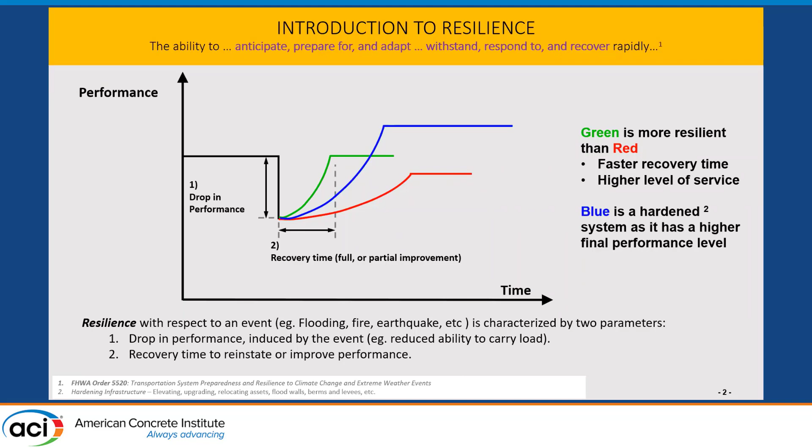So my outline today, now that we have the definition and hopefully a pretty good understanding of what resilience in terms of pavement means, this is what I hope to cover: the why, the need, of course, for resilient airfield pavements. Why is it so important today versus, say, 10 years ago?

How to design for resilience. What's the FAA doing today that maybe wasn't being considered 5 years ago? And then I'm going to share a couple case studies to let you see how airports are already incorporating resilience into their decisions as they're rehabbing their pavements.

This picture here is of a GA airport in Eastern North Carolina after one of our severe weather events, I think back in 2018. We had over 3,000 roads that were closed at one time, and we had several airports closed, international airports as well as GA airports.

These airports for many communities are the lifeline to get supplies in. Roads were being cut off, so you needed that airport to bring in water, to bring in medical supplies. And obviously, when your pavement's underwater, it's difficult to do that.

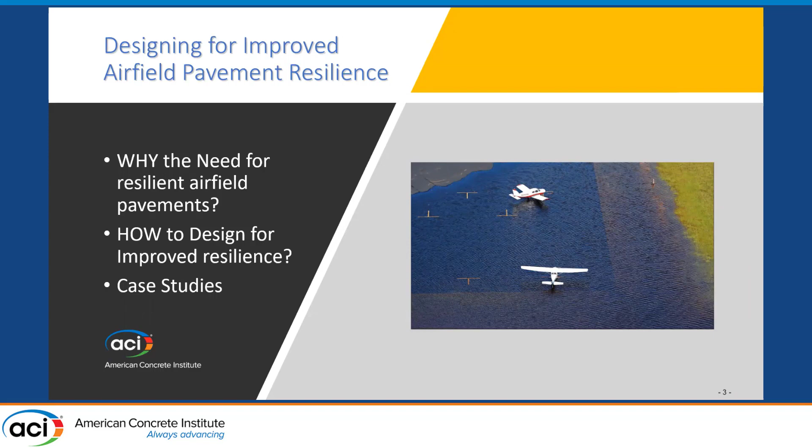So how have our climate conditions changed recently? This graph illustrates that very succinctly, based upon studies that our precipitation and our weather events are becoming far more intense.

As you can see here, by the late 21st century, we're expected to see a large percentage change in severe weather, especially up in the Northeast and out west.

I think most of you have seen studies or read recent reports about what's happening with sea level rise. Obviously that's not impacting your airports in the middle of the country, but it is impacting our airports that are in close proximity to oceans.

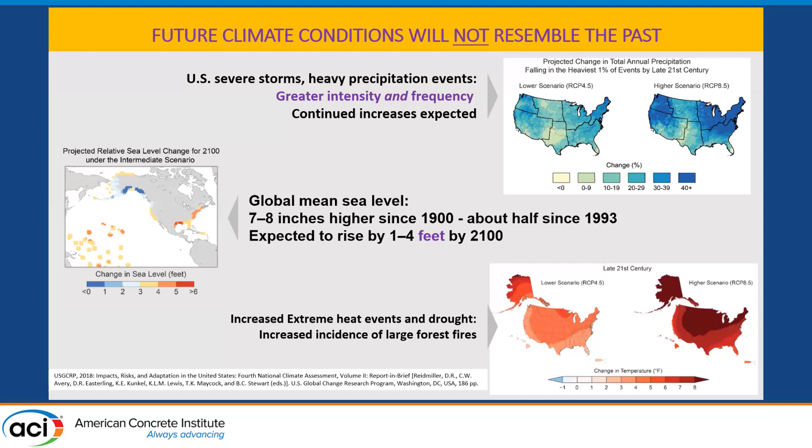Some of our infrastructure is also being impacted by heat events and drought. So most of my talk today is really going to be talking more along the lines of flood. Again, being from the Southeast, that tends to impact us more.

This slide is from McKinsey and Company. It illustrates, for all the various transportation assets, certain types of shocks and risks that can be incurred by these various events. As you can see for airports, some of the more severe ones are your storms, your hurricanes, your intense rainfall events that cause flooding. A lot of our airports are now being impacted by that.

So climate risk increases the operating costs for these airports, as well as exacerbates that funding shortfall that I'm sure most of y'all are well aware of. There's just not enough money to take care of our existing rehab, much less what's likely to occur in the future.

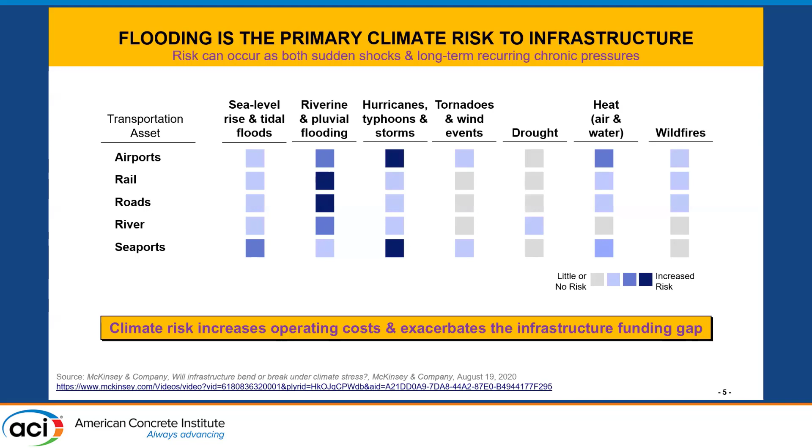So I mentioned sea level rise, and what's happening is due to our warming climate. We're seeing melting ice at our two poles, and just the nature of a warming climate, the particles get larger, and therefore the sea level comes up.

So these are what's called king tides or sunny day floods. In other words, these floods are occurring without any additional rainfall, and we're seeing our infrastructure impacted. Here in Miami, Florida, water is overtopping our roadways, and it may not be overtopping our airports as much, but we're seeing increased groundwater rise.

So a recent study I saw is in Charleston. Just in 2019, we had 13 days where water, due to sea level rise, sunny day rising tides, impacted our infrastructure. I think it was 20 years ago we were experiencing only 2 days of this. So in that 20-year period, we're seeing an increase just due to sea level rise.

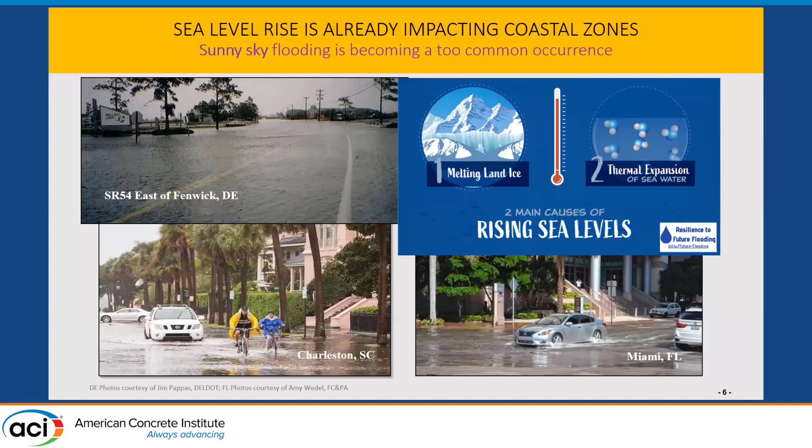Again, this is more pictures of where I live out in the Outer Banks. Just due to hurricane events, our runways are getting overtopped during these events, and then again, what I mentioned with that McKinsey slide, when it's not due to ocean water coming over top, we're seeing more and more river flooding due to increased rainwater events.

And again, this is impacting middle America. Many of our airports in the middle of the country are being impacted by this. So what's happening when water goes over top of our pavement is the pavement condition curves accelerate. I'll show you an example of that a little later.

The reason why is the water that's either coming over top of the pavement, but also increasing coming up from the bottom. Studies are showing that subgrades, depending on your subgrade material, can stay moist for over a year. People think, well, the water's gone, I'm fine, let's get the air traffic back on the runway, and you do - you've got to get your airport back open. But what's happening is it's stressing many of these pavements because those subgrade materials are wet.

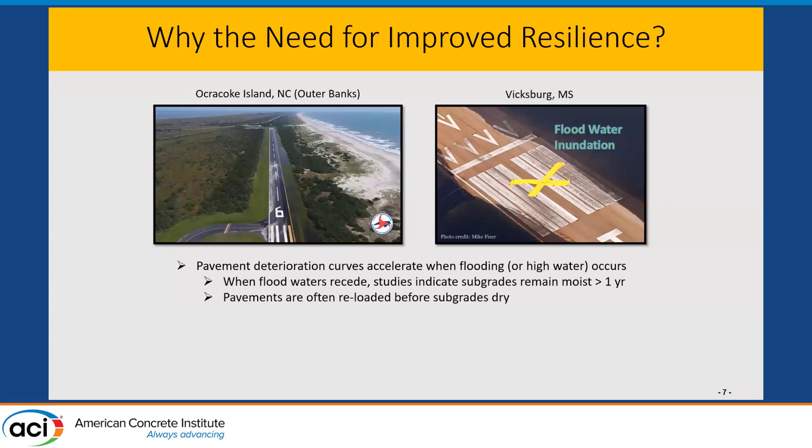So you'll see here what's happened is there is a difference. I wanted to point out how pavements respond to subgrade moisture, and again, it's designed for it - FAA designs for this. So asphalt pavements are known to be flexible, right? Rigid pavements, concrete pavements, are known to be rigid.

So with an asphalt pavement with a given load, especially for a lot of these GA airports - general aviation, small airports - that asphalt thickness is not that thick, and most of the load is really carried by the base and subgrade materials. With concrete, which is a more rigid system, it tends to spread that load out - you can see the shape of how that load is impacted down into the subgrade. Concrete's rigidity spreads the load, so the pressures on the subgrades are much lower. You can imagine that concrete's rigidity, being able to spread that load over a weakened subgrade, would be more favorable.

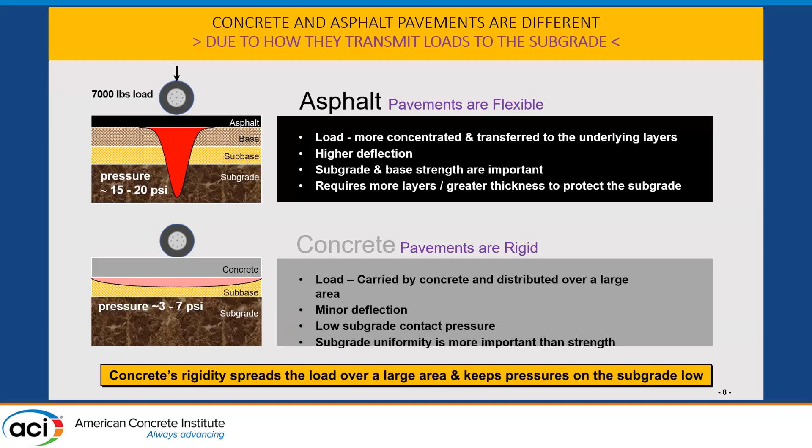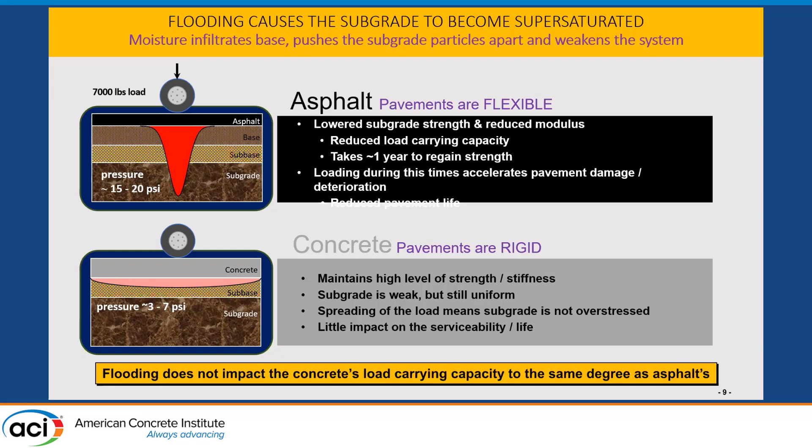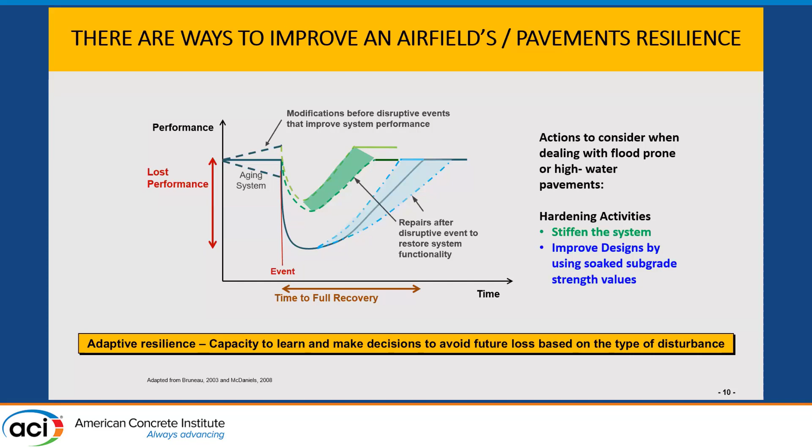So there are ways to improve an airfield pavement's resilience—that's the how, not the why. Going back to that aging system, there are things you can do, whether stiffening the system or using a particular rehab technique, so the pavement's performance isn't dropping off as fast and rebounds back higher than where you started. That's the adaptation part of the definition of resiliency. If you do things during rehab, the next event won't have the same impact—you won't see the same drop in serviceability before and after.

Here's a good example: another airport in Eastern North Carolina, Rocky Mount Wilson, right along the I-95 corridor. When hurricanes come up the coastline, people assume the damage happens right along the coast, but that's not true—a lot of that water gets thrown 100 miles inland into the Midlands or Piedmont of North Carolina. So it's actually some of our interior airports that get impacted more by hurricane events than the coastal communities. I'm not saying coastal communities don't have flooding issues, but many Piedmont region airports start experiencing things like this, where you see staining of materials coming up through cracks in the asphalt and sometimes the concrete.

So what you want to do is address this with your rehab. What's the FAA doing? That's why I wanted to show this chart—they just released a new design circular in June, illustrating why and how resiliency is becoming a larger factor. If you look at their prior edition, the 6F versus the 6G, the term 'water inundation' wasn't even mentioned in the 2016 circular. Now in 2021, it's mentioned twice.

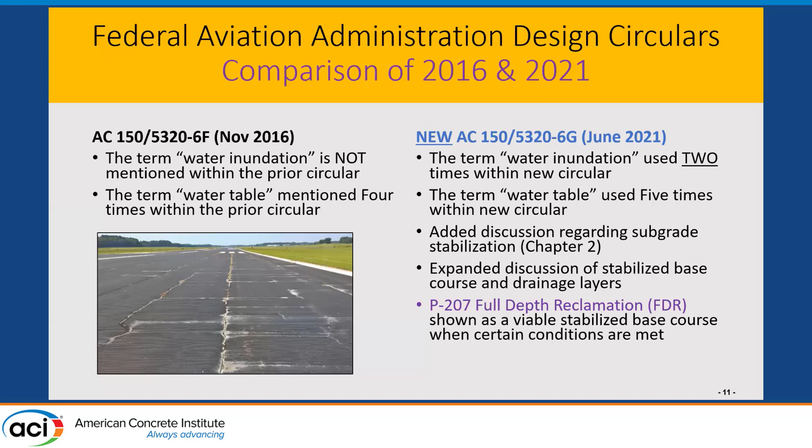So they're stressing the importance, as a consultant, of developing the appropriate rehab strategy—saying consider if that airport has been inundated with water. Although they've always used the term 'water table'—where's the water table below your pavement—that too is getting a larger focus. With the new circular, you're seeing added discussion regarding the importance of subgrade stabilization. I'll share why they're emphasizing that. There's also a new technique I wanted to bring to light for those who may not be aware—called full depth reclamation—things you can do to stabilize that base as you're rehabbing the pavement.

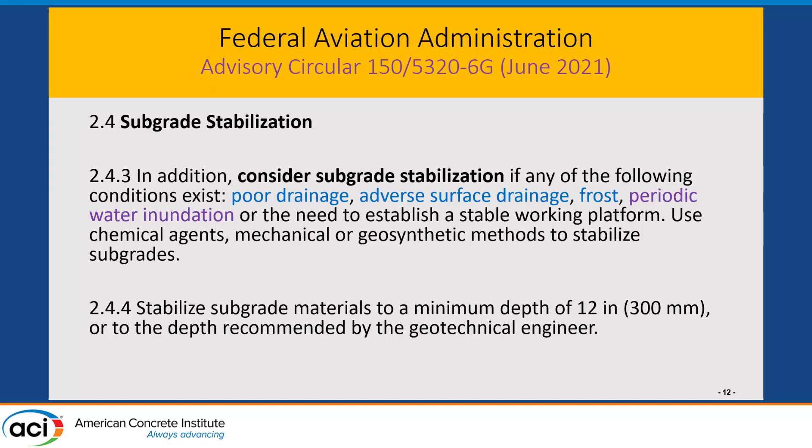So subgrade stabilization is part of that design circular. The latest version now says, under subgrade stabilization, you should consider it if you have certain conditions. It's always included poor drainage and adverse surface drainage, but what's new is this 'periodic water inundation.' So the engineer who goes out, completes field studies, and looks at the history of that pavement now has to take into context this term water inundation. It encourages you, through this circular, to stabilize that subgrade material—something that wasn't as emphasized in the older version.

So how do we improve the resilience of our airfield pavements? These are techniques that can be considered when the engineer goes out and does evaluations. You can stabilize that base through various specifications—the 207, which I just mentioned, and the 304, 306, and 307, which have always been there. These are different ways of stabilizing your bases or providing a stabilized base under your P501 concrete layer. The 307 is actually a drainage course, something I didn't see much of in our southeastern area. This picture is at an Air Force base in eastern Fayetteville, North Carolina, where they used a cement-stabilized drainage layer.

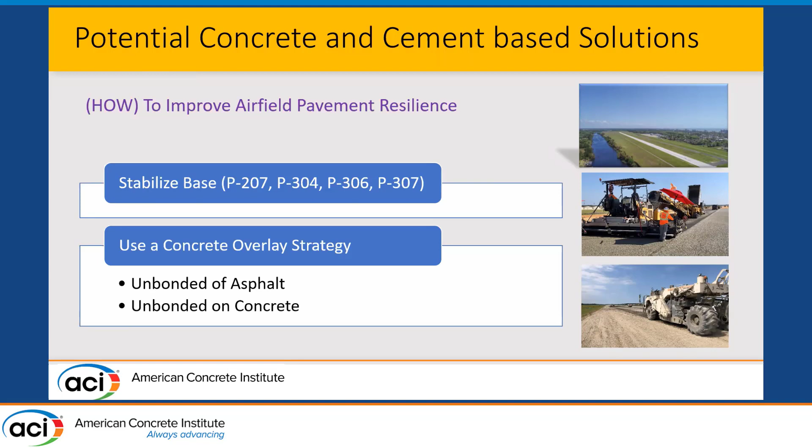What we're seeing in this new circular is added emphasis to consider using those kinds of materials to help move water in a positive direction. The other technique I'll talk about is this concrete overlay strategy, and I'll go through that quickly. So what does FDR do for you?

It hardens your system. Compared to an unstabilized material, it lowers those pressures right in your subgrade. That's what full depth reclamation does. It minimizes, though doesn't totally eliminate, the permeability of water coming up from the bottom and affecting this top layer. It's that capillary action that causes your subgrade materials to get weaker.

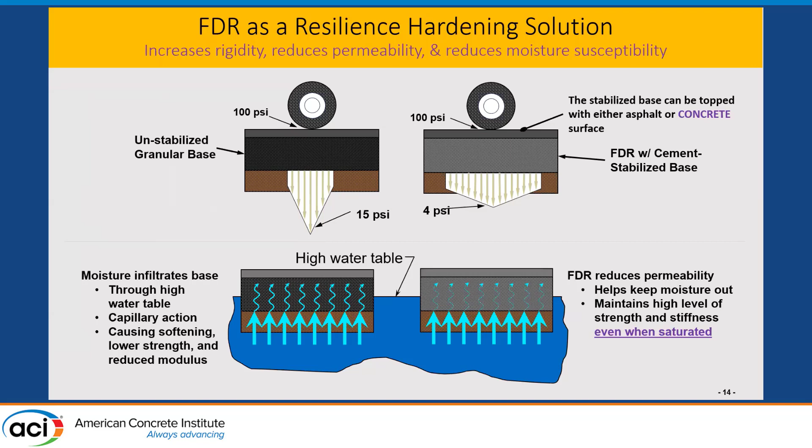That's the reason we're seeing techniques like full depth reclamation being used more, especially for general aviation type airports. This shows the diagram of full depth reclamation for those who haven't seen it before. Here's the equipment that reclaims both your distressed asphalt pavement and captures some of that base material underneath. Then you put a binder with it, typically cement, to make it harden.

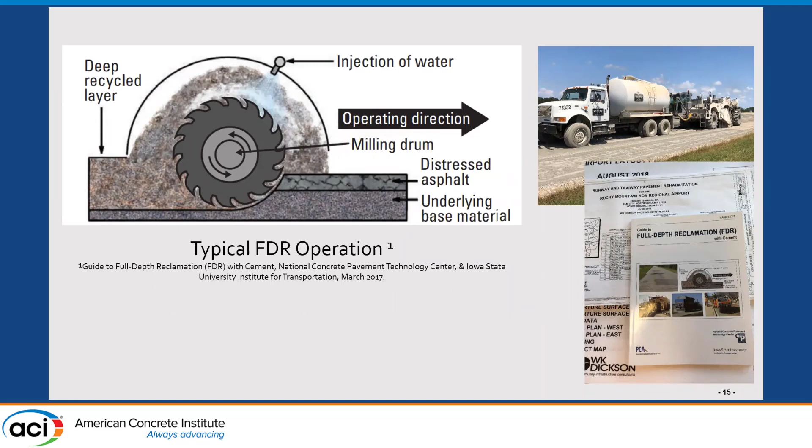The CP Tech Center has a great bulletin on full depth reclamation you can pull from their website. We're seeing that rehab technique used for general aviation airports—not the big commercial airports Mark oversees, but smaller airports, and there are thousands of them across the country. When that asphalt pavement begins to distress and need rehab, more and more consultants are looking toward this type of technique.

This shows that when your asphalt surface is distressed, you go through and reclaim it, pulverizing these materials. You even capture a little subgrade in it. Then you come through and grade it off because you're going to be putting a new surface in.

Here is when you start injecting cement and water. This is all done through a geotech firm that usually designs this material—how much cement, how much water you need. Then this new surface, which can be either asphalt or concrete, can be placed directly on top. These are the steps of using that full depth reclamation process.

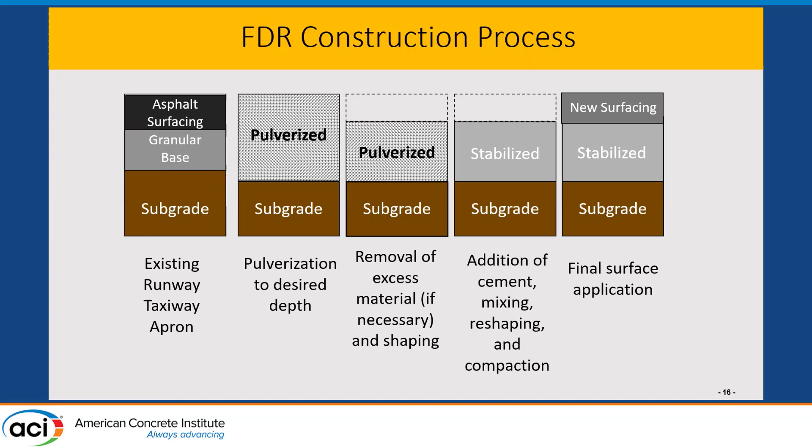This is just a typical diagram. Again, this isn't Georgia—this is GA, meaning General Aviation Runway. This is just a typical section that I see as this technique is being used.

The question I commonly get with these jobs is, how important are these edge drains? They add cost, right? We know these pavements are affected by water. For an airport like New York or Atlanta Hartsfield, edge drains are pretty important. For a general aviation airport, is there enough value? That's a good research topic, Peter. We're seeing questions from the consultant community saying these edge drains can be 10% of the job costs for these small airports. So it's always cost versus benefit.

The other big question we commonly get is, how strong is too strong for that new reclaimed base? Everyone wants to add more cement, thinking let's build the strongest base we can. That's not the best, is it? If you build it too strong, this base cracks, and especially if you top it with an asphalt pavement that has a lower modulus of elasticity, every crack that forms in this base reflects up through it. That's one benefit of topping it with concrete—we don't have to worry about the strength as much. But on most jobs topped with asphalt, you really need to control the strength of that base. That's why it can be too strong.

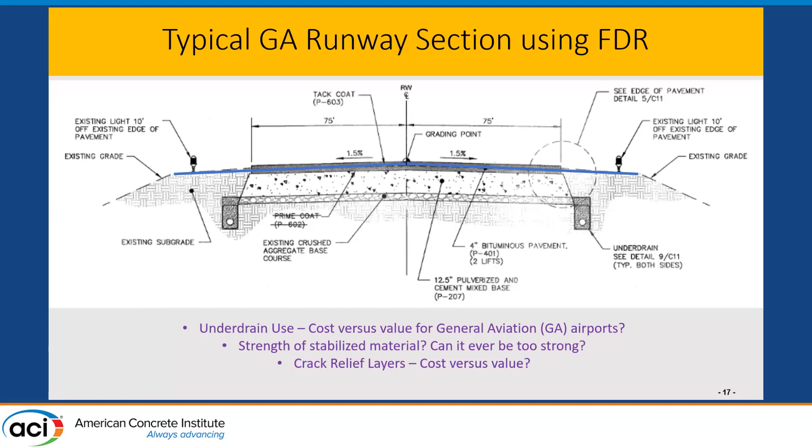And by the time you put in your edge drains, put in crack relief layers, you're just increasing the cost of your projects. That may be warranted, but it's something to think about.

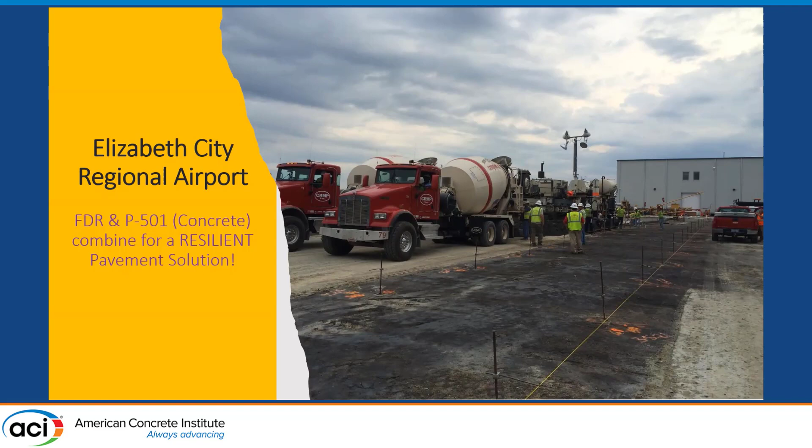Here is a case study at Elizabeth City where we not only reclaimed the base, but the old asphalt pavement was removed and reclaimed. You can see the FDR has already been placed on top, and this is the prime coat that's placed usually on top of that. Then for this particular job, we actually placed the P-501, which is the concrete layer, about 9 inches of concrete for this GA airport in Eastern North Carolina.

So what's another strategy? I'll be shocked, Peter, when you develop that research about how to fast track projects, if you don't find that at least half the projects being concrete overlays, because if you want to do something fast, you want to use a concrete overlay.

The reason why: anytime you get down in the subgrade, you're exposing the subgrade to the weather elements, right? That's a project delay. So I always tell consultants, evaluate a concrete overlay first. If you have to eliminate it because you can't tie to it, or there's other reasons why it can't be used, I understand, but make sure you evaluate it, because it will be the fastest and most cost-effective solution.

As far as resiliency, it does two things. A, it increases the structural strength, but B, it also increases the height. It gets that pavement off the rising water table. So it's less impactful in the future.

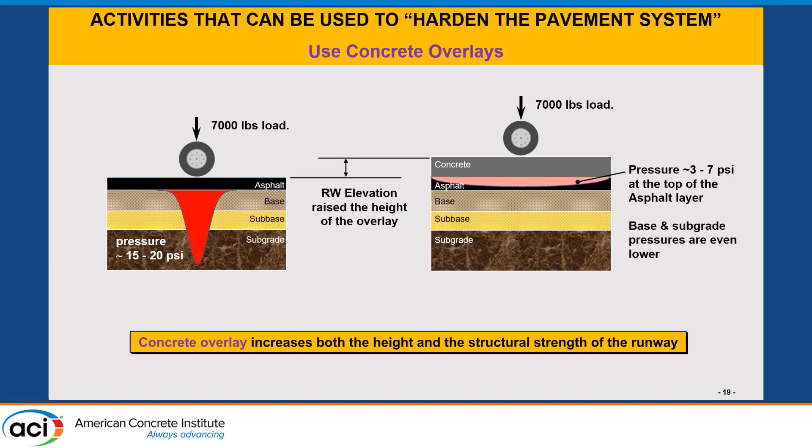The concrete overlay market is a growing market for our industry. I think it was 20 years ago we were only doing about 2% of our concrete paving volume with concrete overlays. Today it's 12% of our market. So it's a growing portion of our market, and it's an important one.

The two that I see being used by airports—I very seldom see bonded overlays, so I'm not even going to talk about those. It's part of the design circular, but you need special permission. These are the two I see: unbonded, placing the concrete directly on top of the asphalt, or placing concrete directly on top of concrete, with the key part being that separation layer to make sure any underlying distress in the old concrete pavement doesn't reflect up. That separation layer today can either be an asphalt material, which is most common, but we're also seeing more geosynthetic materials, fabrics.

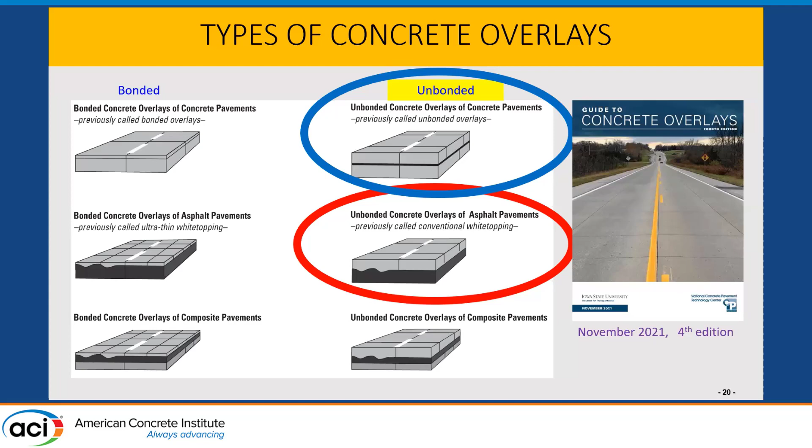So again, ACPA, the American Concrete Pavement Association, we're profiling these kinds of projects more and more, because we know it's the future of our industry—they're cost effective, and they're resilient overlays.

It's not only meant for small GA airports, though. I think you'll hear in a bit how JFK utilized a concrete overlay to develop a 50-year design.

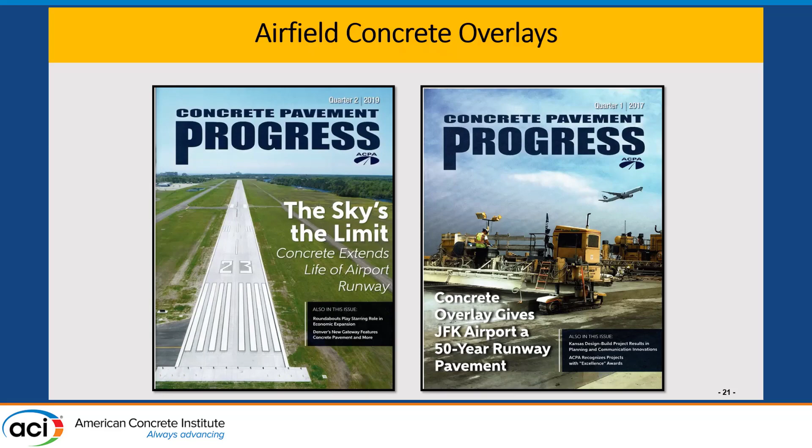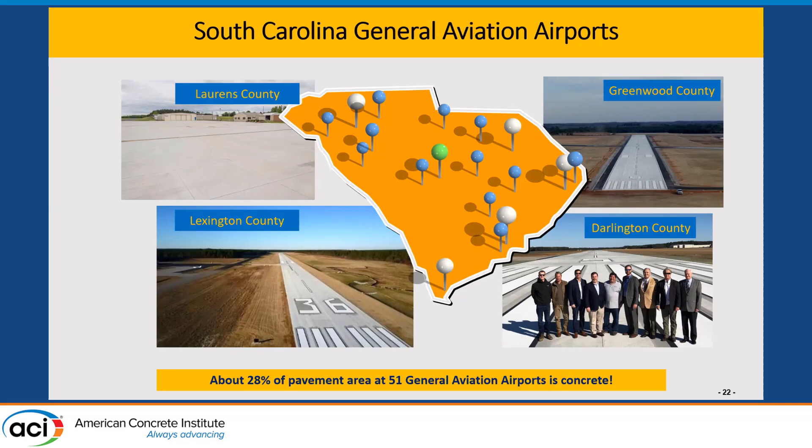In South Carolina, where I'm responsible, we're seeing more and more of our local airports use concrete solutions. In fact, about 28% of our GA airports in the state—the blue pegs identify where concrete's been used. The white pegs are commercial airports that have used concrete. Most every commercial airport in the state has used some concrete, but it's these GA airports we're seeing more and more utilize concrete solutions because of their added resiliency and durability.

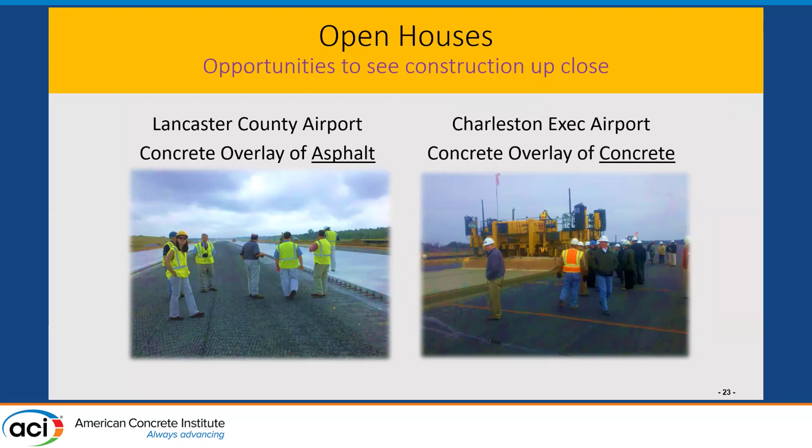We're doing open houses on some of these projects just to help consultants and designers understand—this was one in Lancaster, and another one down in Charleston.

So let me describe what happened down in Charleston where they did the unbonded overlay. These are quotes from the owner about what the concrete overlay did. Again, it kept us out of the subgrade. Anytime you can stay away from the subgrade, you're speeding up construction. Anytime you're raising the pavement elevation, you're getting off of that high water table. You're improving the resilience.

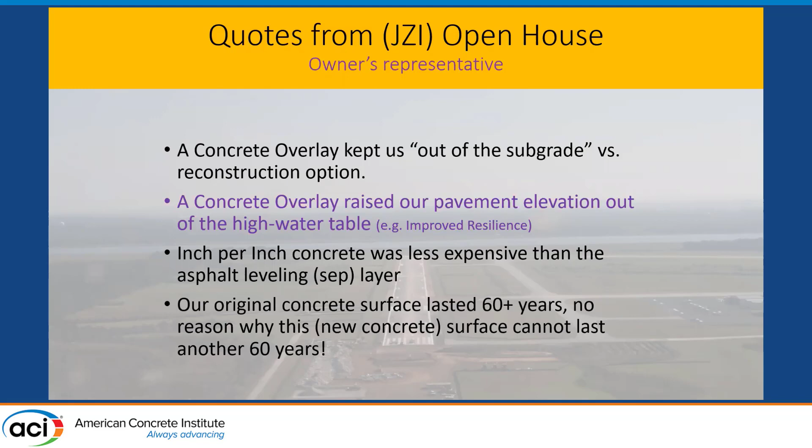The old concrete that was there was 60 years old. It dated back to World War II. And he believes that the new surface will also be a 60-year design.

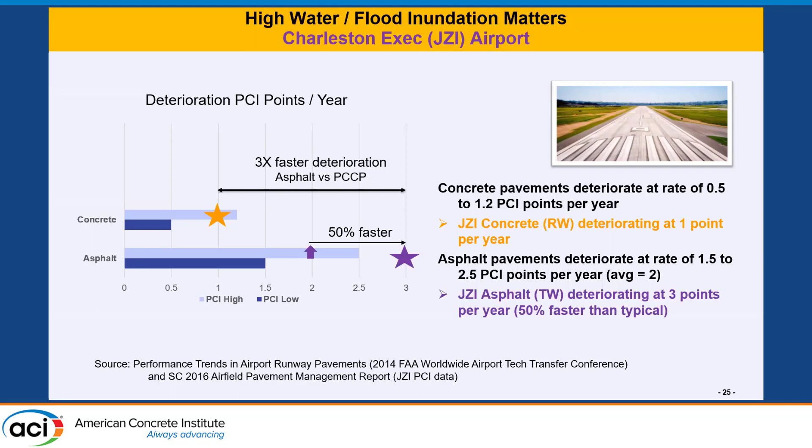As I mentioned at the beginning, the PCIs, the pavement condition index, concrete versus asphalt - a study done by the FAA in 2014 shared a range of PCI deterioration. As you can see, for concrete, we're still within that range. With asphalt, where you have those high water tables, you're seeing it exceed the normal deterioration by 50% faster. I attributed that to the high water tables.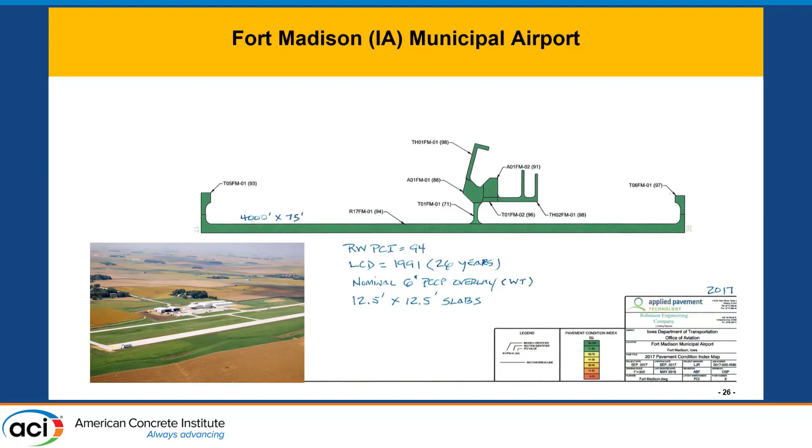And that helps illustrate why resiliency and water inundation matters. It's happening throughout our country. It's not just the coastal area dealing with flooding, but many airports in Iowa have had similar experiences. They've used concrete overlays there for many years before we even started our overlay program. This one is in Fort Madison, and this slide illustrates some of these airports that have been done with white topping.

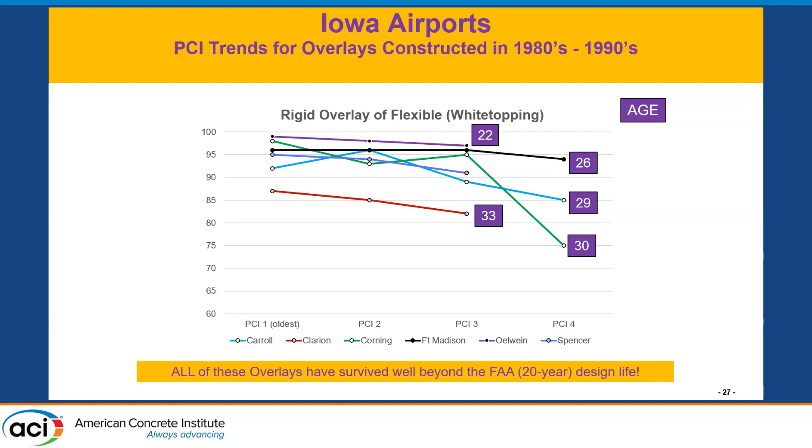This shows how old these pavements were at the last investigation of the PCI, and you can see the PCIs on some of these older pavements. The FAA only uses a 20-year design life. We're already at 22 years, and our PCI at this airport is like a 97. Out here we're at 26 years, and our pavement is still like a 94. These conditions at airports that have received concrete overlays are standing up very well.

I found this one as a testimony of how we're paying more attention to resilience. Here's the water. This overlay was done in 2011 on an old 70-year-old concrete pavement that had received asphalt in the past. Now they wanted a longer life solution. So they evaluated reconstruction, putting another asphalt overlay on it, or a concrete overlay. They chose 8 inches of concrete because they felt it was more resilient, where they have a high water table that in the past had added to the stress.

Some of the things they did to improve that design - they used dowel bars at every joint. Mark knows that the FAA doesn't typically require every single transverse joint on this kind of airport to be doweled. For this particular airport, they did. But still, by using a concrete overlay solution, they were half the cost if they had gone in there, torn out the entire pavement structure, and put it back.

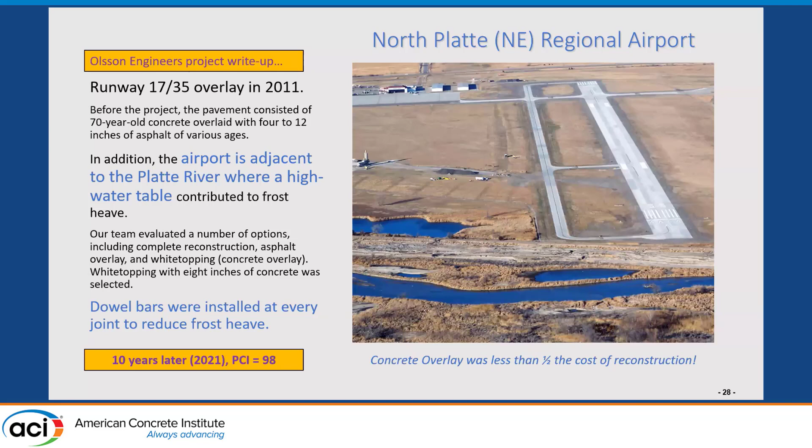So there's another great case study that says, if you want to do something fast, consider a concrete overlay versus reconstructing it. And look at today, 10 years later, the PCI on that is still a 98 out of 100. So it's holding up very well.

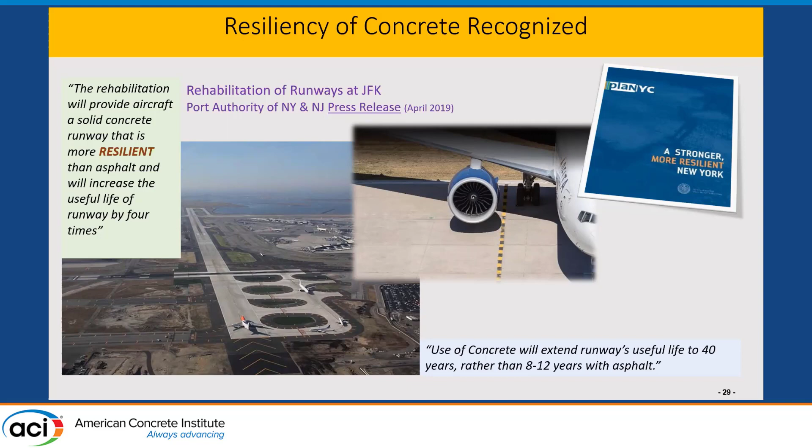I had to show this one since Mark's moderating this one. I found this on their website, but they talk about the resiliency of concrete, and y'all can read that for yourself. It illustrates that with concrete, they feel like they'll have a 40-year life versus an 8 to 12-year life with asphalt. So I used that slide. This was a press release by them back in 2019.

So in conclusion, airfield pavements are being negatively impacted by our changing climate, and they're going to continue to be impacted. We're going to have to use both green and gray solutions. What I shared with you were the gray solutions, but there are green solutions being talked about more and more to help improve our nation's infrastructure. So these are the things we've got to consider doing.

These are the things we need to take into account - requiring pavement designs based upon a lower subgrade strength. The FAA encourages that already, but we need to continue to push that and consider it. And stiffening the system is one of the key things. If you want to build resiliency, if you want to improve your resiliency, stiffen your system. There are low-cost solutions such as stabilization techniques as well as concrete overlays that can be used to do that.